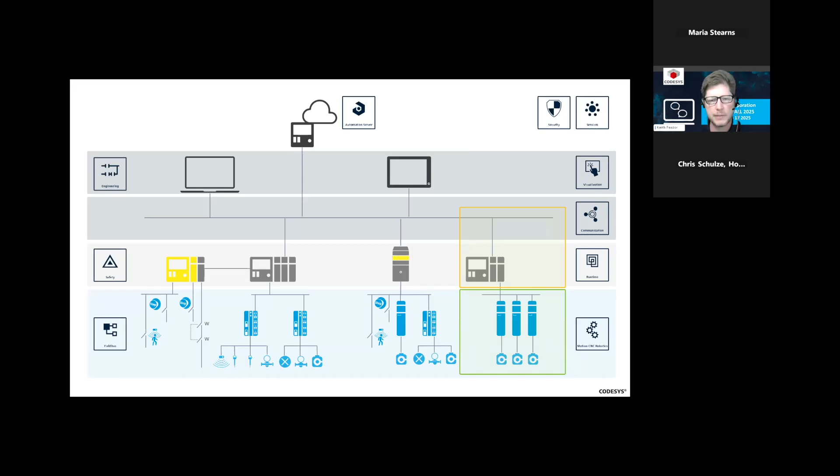Here are some of the things we looked at when it comes to what we want when we build a motion controller. We are a world-class manufacturer of stepper servo amplifiers and motors, so we do that all day long, that's our bread and butter, we are very good at that. But what we wanted to do is look at how motion control has evolved over the last 20, 25 years. One way it's evolved, we took a look at, is it needs to be flexible. Flexibility seems to be the name of the game.

Codes get updated in the field. It could be on a weekly basis on a production line, it could be on an hourly basis. We were reviewing product: did we want to write our own code, or do we want to use something that's already been pre-written and has a very excellent track record to it?

And that's when IEC 61131 started to come on the world stage, and CODESYS meets that requirement. That makes it nice and easy as a platform for engineers and programmers alike. They have a set standard on how they can actually program the device, in this case, our motion controllers.

It had to be scalable, because applications that we deal with can involve one servo motor or one stepper motor, and we can go up to ones that have 64 axes of motion on it. So it had to be scalable, whatever platform we used.

Just as important, we needed to have EtherCAT compatibility, because the way we go from our motion controller to our servo amplifiers or stepper amplifiers is we use the open source EtherCAT protocol. We use EtherCAT because it's pretty much real-time deterministic, super fast. All you have to do is daisy chain an Ethernet cable between our drives, one in, one out, one in, one out. We don't have to do any kind of cables that have 20, 30 wires in it, it's a simple Ethernet cable.

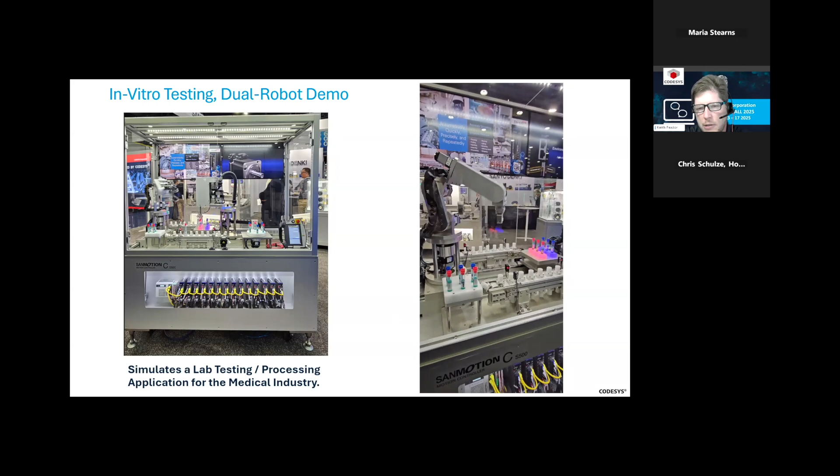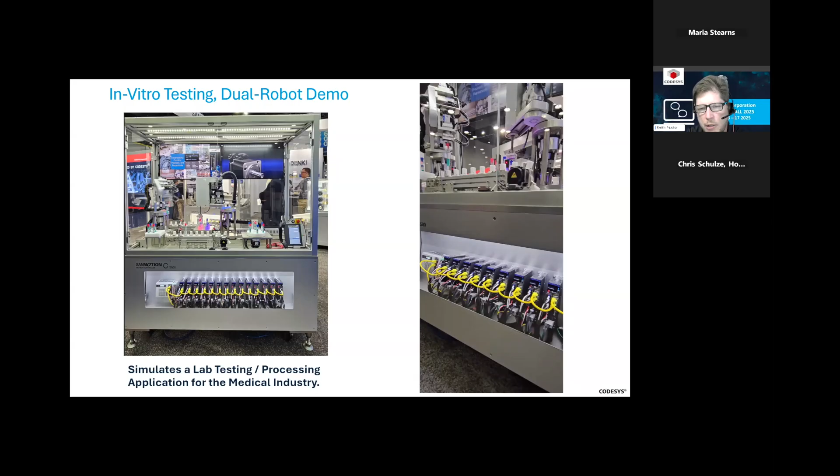That's just showcasing how we have the kinematics built into our motion controller via CODESYS. As we were picking up different color test tubes, we had red test tubes and blue test tubes, sorting them by color. There's handshaking of all types going on with the SCARA robot and articulated robot, and those two indexing conveyors. We also have the rotary there, putting the test tubes in front of a color sensor. So that's a fun run right there.

Why it caught a lot of attention at the show is there's a lot of applications we get involved with specifically for the medical field and automated lab equipment. It seems that's one of the fields we're seeing more and more people get involved with - automation of any type of lab testing, whether it's any kind of fluid sample, blood, or testing cancer cells. It's almost an unlimited field these days. And I've noticed that with an aging population, especially here in the United States, the medical applications are definitely starting to increase exponentially.

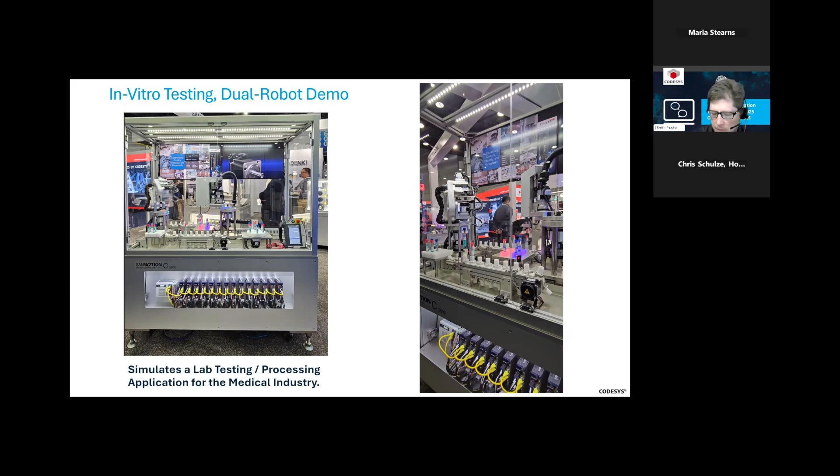Here I'm going to go over a couple details on what we utilized to get this to work with CODESYS. We had 14 axes total on that one S500 controller, and that same controller can actually go up to 64 axes of motion, so we were not making that thing work too hard at the trade show - we could have done 64.

Six of those axes are on that articulated robot that we saw on the left-hand side of the demo. Four of them were for that SCARA robot on the right side. We had 2 axes on the conveyor, 1 linear motor axis, and 1 rotary table axis.

Here on the right side, here's the kinematics built into that SANMOTION S500 controller. We can do Cartesian robot, typical XY or XYZ. We have SCARA robot control built in, you saw that in the demo. We can do Delta robots, those are fun ones, usually in food application areas. Palletizing robots, not a problem either—that's where we get into some bigger servo motors usually. And then 6-axis articulated robot, that's what you saw on the left-hand side of our demo. Those kinematics are all built into that controller, and they're all programmed via CODESYS.

Some of the areas supported around CODESYS include everything with our drives. That was EtherCAT communications, the yellow cable, so we just ran Ethernet between all the drives. We had a teach pendant that we had talking to it in case we wanted to readjust any positions at the show. And then higher level up, we can talk different protocols like HTTP and others if you want to bring that data to the outside world, specifically up to the cloud.

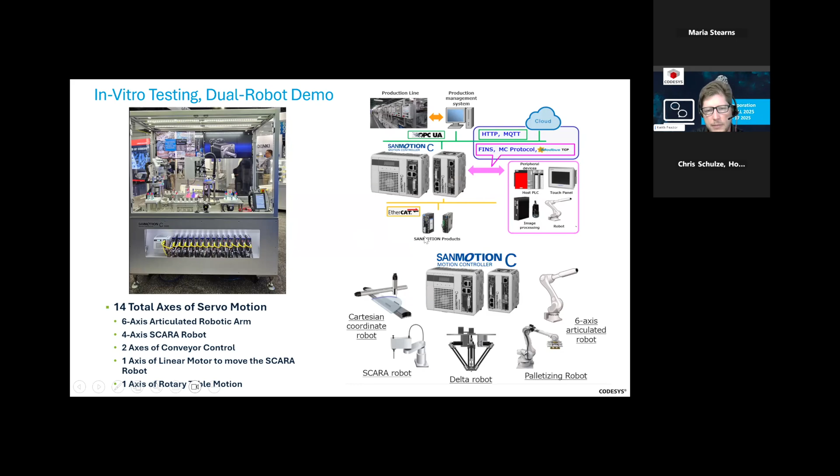Some of the ways we program that demo—this is one of the questions I get asked by the engineering types—is because it is 61131 compliant. We usually go with 3 different flavors of how we like to program: structured text, function blocks, and sequential function chart. That's the 3 most popular ways we control our motion inside of there. And with CODESYS, you can mix and match that all day long—some parts in structured text, some parts in function block, some parts in sequential function charts. However you want to program it, it's up to your imagination.

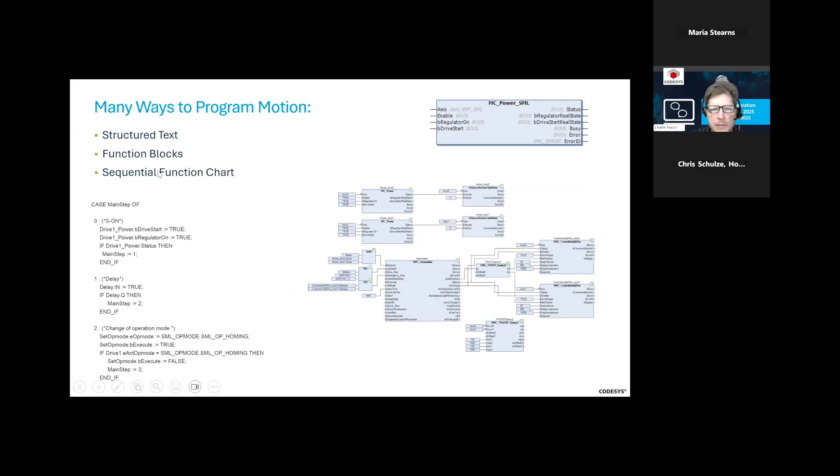The last demo I'd like to show is a smaller application. We originally had that 14-axis lab demo, but I'm going to go to one that's a little bit smaller. This one's only going to have 5 axes, but it just shows a smaller controller of ours and a bit different application type.

This is our ball sorting demo. We had 5 axes of servos here, and it actually looked at the color of ping pong balls inside this demo—they got shot up through a tube. We looked at it with color sensors, and we could sort those balls individually by what color each one had. At the bottom of this demo we have a smaller controller, our S100 and 200, and it was controlling 5 servo drives over that same EtherCAT interface.

So a little smaller application, but we're doing a similar programming style—EtherCAT out of the controller, off to our servo drives, and using CODESYS. Go ahead and play the video for you guys.

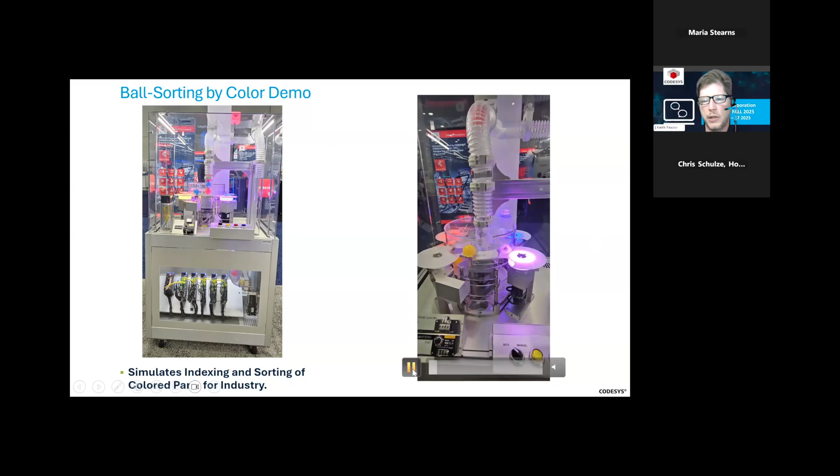The balls are coming up and down. They actually get blown up by one of the fans that we manufacture from the sister division of SANYO DENKI. They come down and then get sorted by color. We got 5 servos on here, all coordinated. We have these round discs, you'll see 4 of them with a different color on it, and each one is controlled by a servo motor. Then the 5th servo motor is the one in the middle that does the rotating as the balls come in to make sure they get sorted.

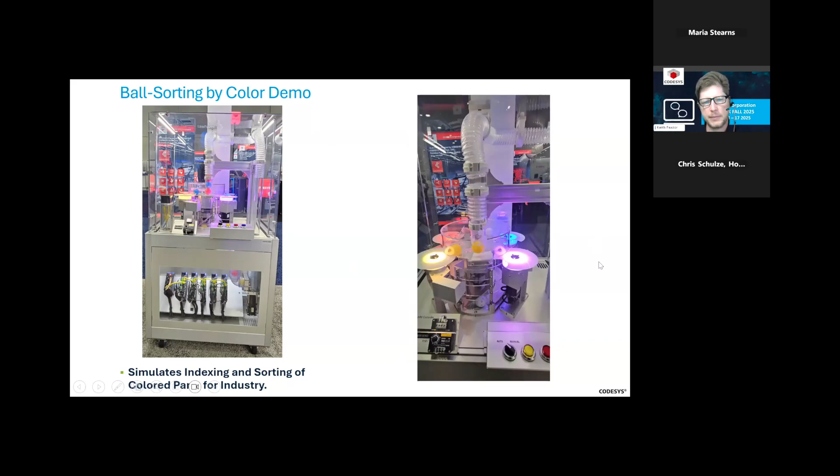So we have 5 axes there. Now, they weren't doing any kind of robot control, but they were certainly coordinated. This one had 5 axes total—one for the middle part where we did the rotary motion, and then 4 discs that rotated to let the ball drop, also rotary motion. So they're coordinated, but not like a robot—coordinated in the fact that it has very specific timing in order to drop that ball. Those discs had to turn real quick and come back to their starting point, and that was all coordinated.